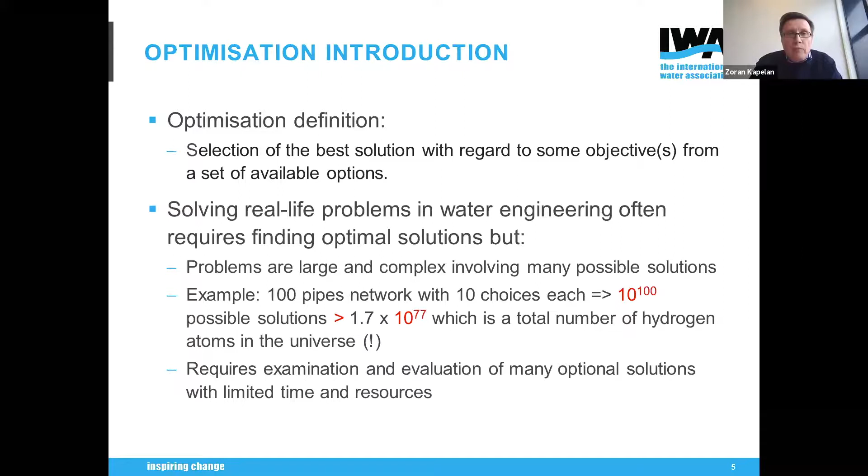So what is a typical optimization problem? Well, the three main aspects of an optimization problem are the objective, decision variables, and constraints. In this little example shown from mathematics, let us assume you want to find the minimum point on the surface of the function y, and you do so by modifying the values of x1 and x2 over certain ranges of values. So x1 and x2 are decision variables, and the objective is to minimize the function.

If I make the analogy with drinking water systems, for example with the least cost design problem, your objective may be to minimize the design costs of interventions over, say, the next 20 years to deal with increases in demand. Decision variables are all interventions that you could apply to individual elements - pipes, pumps, treatment works, anything to do with either rehabilitating existing elements, or duplicating with new, or replacing with new, and so on. In terms of performance, of course, you would want some performance which is above a certain target performance. Otherwise, you would end up with a zero cost design.

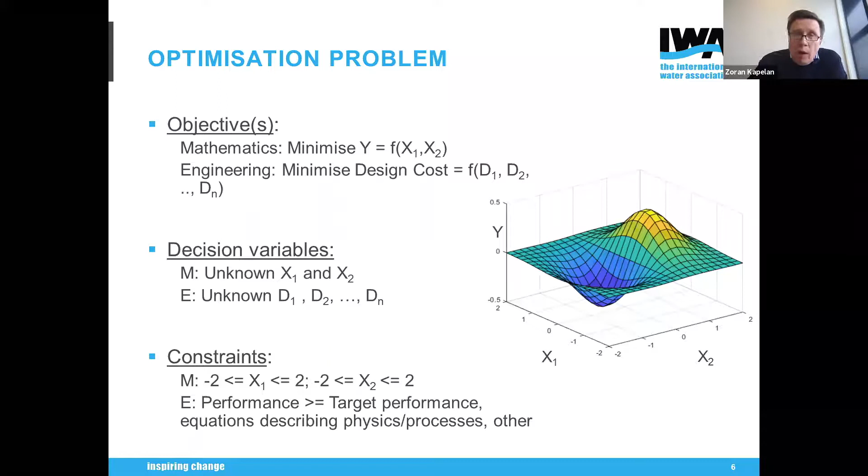In terms of optimization methods, these are used to solve an optimization problem that is formulated by means of objective functions, decision variables, and constraints. Many methods exist - it's impossible today to look into all of them. These are quite often classified in a number of different ways. Here are some examples shown: linear versus nonlinear, local versus global search, and so on. The point I want to make today is there is no single best method, because of the very wide-ranging problems that we need to solve. So it's very important to choose the right method.

This little figure here shows you an example of that. This is from my own work. This was the optimization for the purpose of calibrating some model. On the vertical axis you see an objective function value, which is being minimized, and the minimal value is shown with a dashed horizontal line. The horizontal axis is the progress of optimization. If you use the Levenberg-Marquardt method, the LM method, which is a gradient type method, and if you choose the starting point well...

...then you converge quickly - that's the green line - to the optimal solution. However, if you don't choose the starting point well, then you may end up with a suboptimal solution - that's the black line. As opposed to that, the blue line, the genetic algorithm evolution type method, will give you the right solution, but it will take a lot of time to do that. On this particular occasion, I developed a hybrid method, which is the red line - a hybrid of the two methods, GA and LM, which picks up the best of both. So it consistently converges to an optimal solution, but does this more efficiently than the GA.

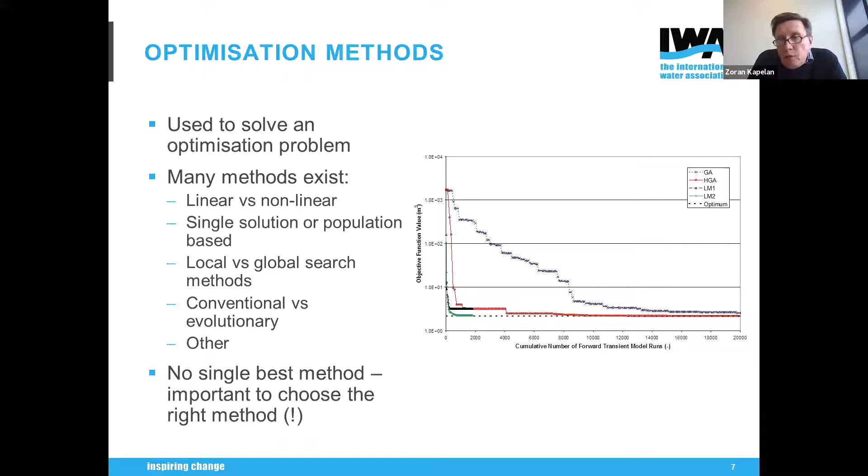Let me touch upon the trade-off between single and multi-objective optimization. Imagine you are optimizing a drinking water system for cost and performance, and you decided on a target performance. If you optimize for least cost design, you get a single point solution. However, this single objective approach doesn't really help you understand the trade-off between cost and performance because you only have one point. If you formulate this as a two-objective problem, maximizing performance and minimizing cost at the same time, you end up with a whole set of solutions shown as a curve. This gives you a much better picture of the trade-off. If you have a budget in mind, you could go for the first solution below that horizontal line.

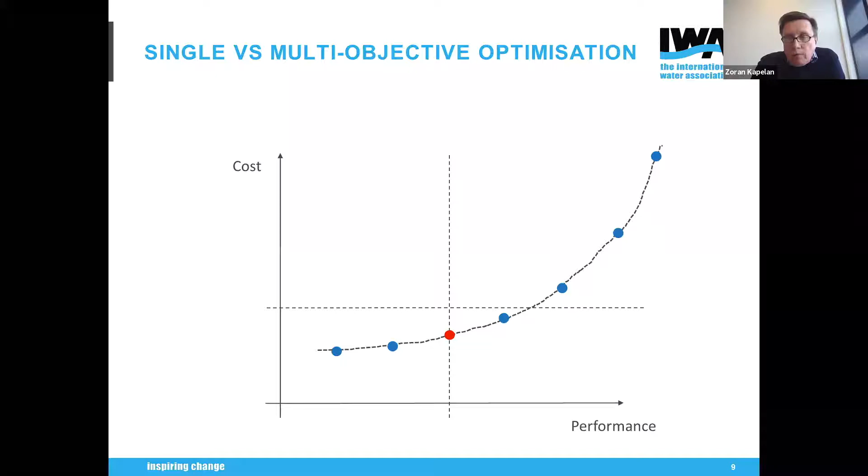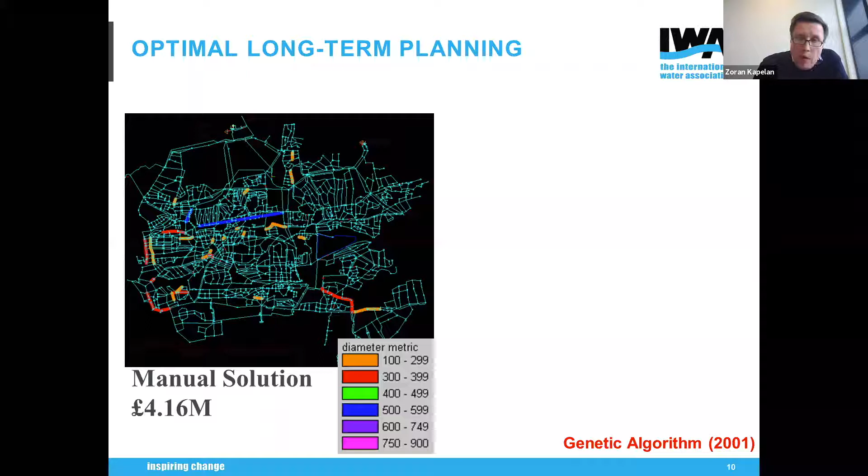Let me give a few examples of where optimization can be applied to drinking water systems. An obvious one is optimal long-term planning. This is the system of Heaton Grange in London, where we used a genetic algorithm back in 2001. This is the manual solution determined at the time by a reputable company. The idea was to strengthen the system for the next 20 years so it could deal with increased demand. The existing system wasn't able to do so, especially in the southwest part where pressure was deficient. The company came up with a list of pipes to be added or upgraded, costing just over £4 million. When we optimized the same problem, we ended up with a solution at half the cost - a saving of 49%.

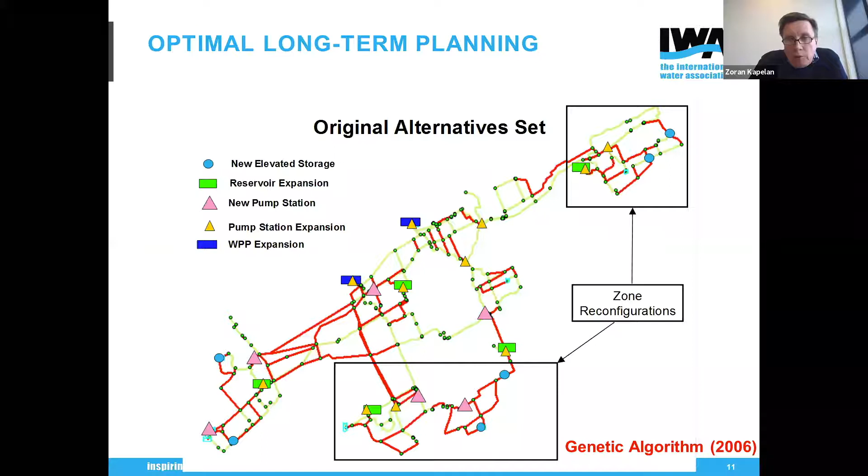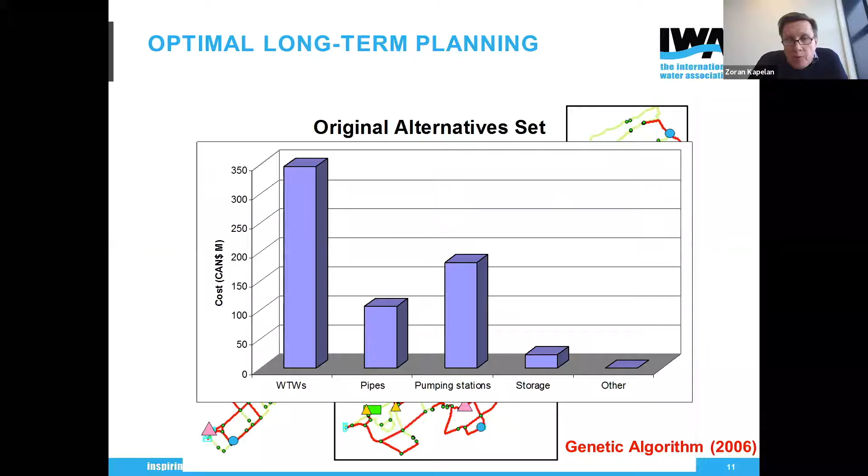Another optimal long-term planning problem I was involved with was the city of Ottawa, back in 2006. This was quite complex, with more than 200 decision variables. It was solved as a least cost design problem, but we had to take into account water quality and other issues. Interestingly, once solved, it turned out the most money had to be spent on upgrading the treatment works to deal with increases in future demand, then pumping stations, and only then pipes. Yet quite often in the literature, pipes are the focus of research most of the time.

Another example is pump scheduling. As opposed to system design, you can optimize an existing system - take the current configuration and see how you can get the most out of it. A lot of people have optimized pumps in the past to reduce energy use and cost. However, most of this was done without considering water quality. It turns out you have to take water quality into account, because if you don't, you may worsen the water quality during scheduling - and that's what this approach helped address.

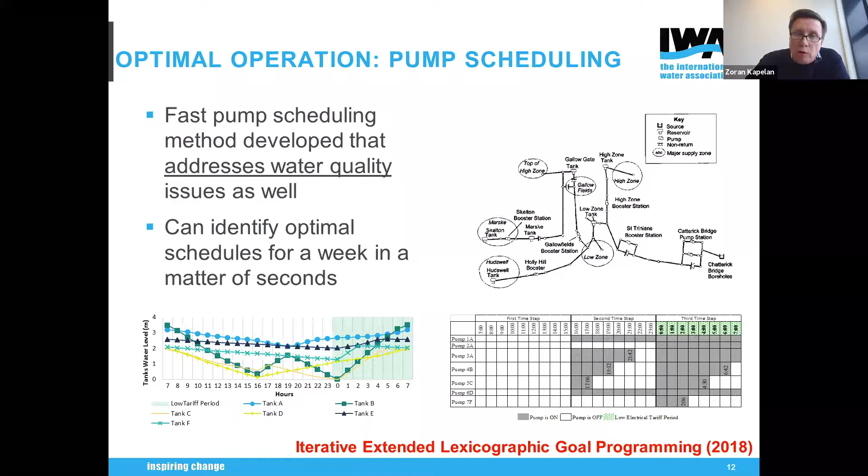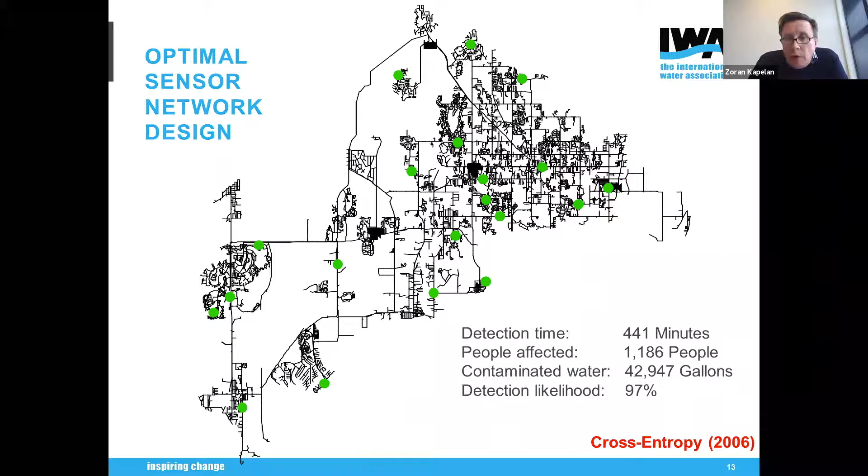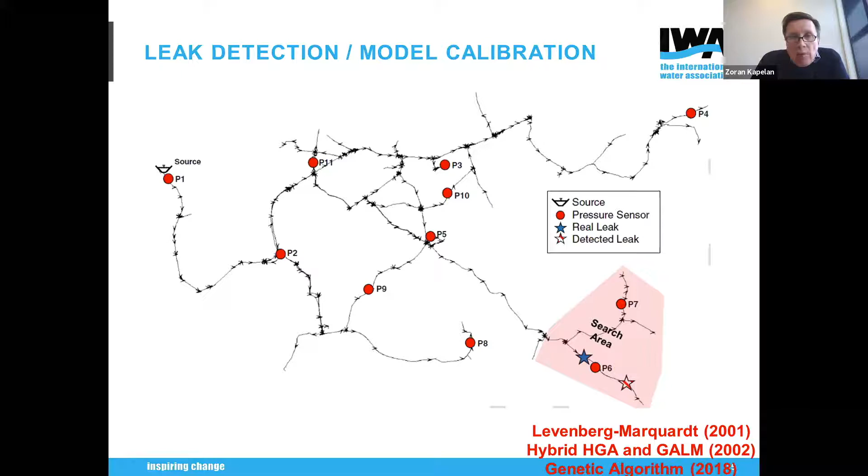Optimization has also been used a lot for leakage detection and model calibration. I've certainly done this myself on a number of occasions using different methods. It can be quite useful for that as well, especially for detecting background leaks.

Optimal real-time response to incident. This is one of the more recent developments in research. As you can see in the top left corner, there's a Pareto front between the negative impact of an event, which is a pipe burst, shown with a red symbol. When the burst happens, all the pipes in this little DMA basically don't have water. If you do nothing, zero interventions, you get a high negative impact - a lot of people go without water.

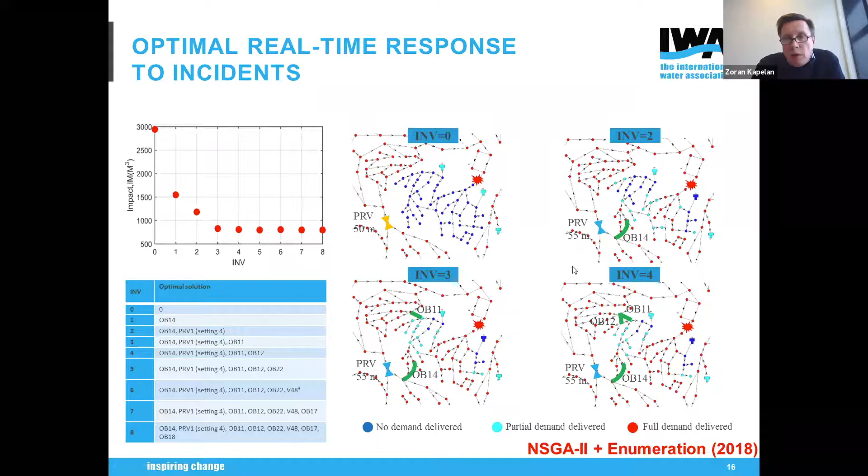However, if you can do things even in near real time to improve things, you can introduce an overland bypass or change the setting of a local PRV from the other DMA, and this will improve things. But this, of course, comes at a certain cost. So with this Pareto front as shown here, a control room operator can quickly decide what to do in the field based on this.

Another example, real-time demand forecasting. The demand forecasting itself on this occasion was done by a neural network, but this neural network's structure and the rest was optimized by means of an evolutionary strategy algorithm. This ended up actually being used by Hong Kong Water Supplies Department a while ago. I'm not sure if this is still the case or not.

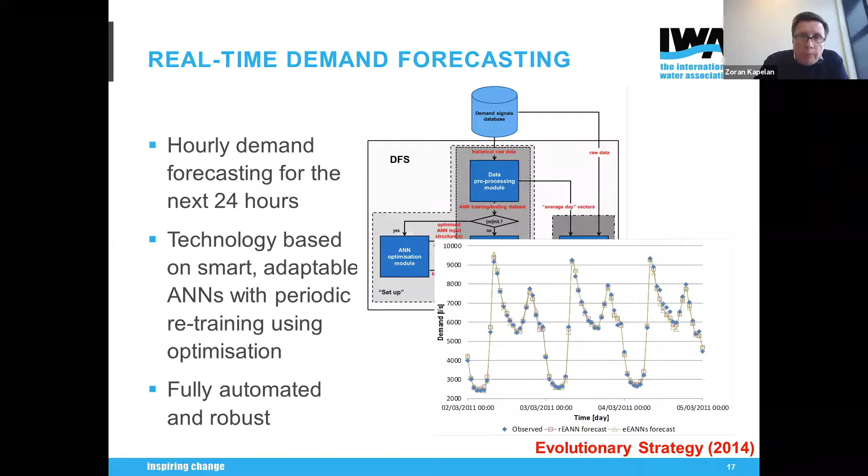Optimal pressure management. In this particular case, you are deciding where in the system to install your pressure reducing valves, of what type - fixed setting, time modulated, flow modulated - to basically reduce leakage as much as possible, or in this case, to maximize the net benefit as shown here. You can see on the left figure that the existing solution and the newly proposed one are quite different, and the newly proposed one ends up with a total net benefit more than double the existing one.

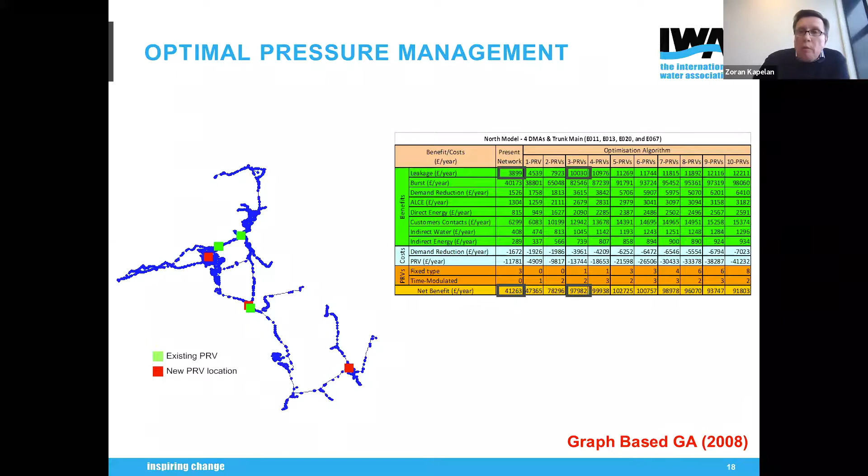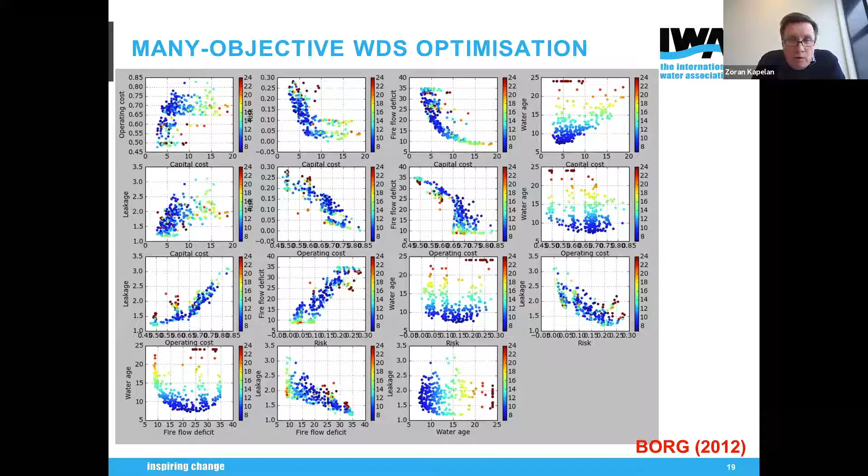The final slide I will show is on many-objective distribution system optimization. I believe this is the future of optimization in drinking water systems. In this particular case, the system was optimized for 6 objectives: operational cost, capital cost, interruption to supply, fire flow deficit, water quality via water age, and leakage, if I remembered well. You can see clear trade-offs of the 6-dimensional Pareto front. But I would personally like to see more of these applications because the real world is more complex than just least cost design. Thank you.

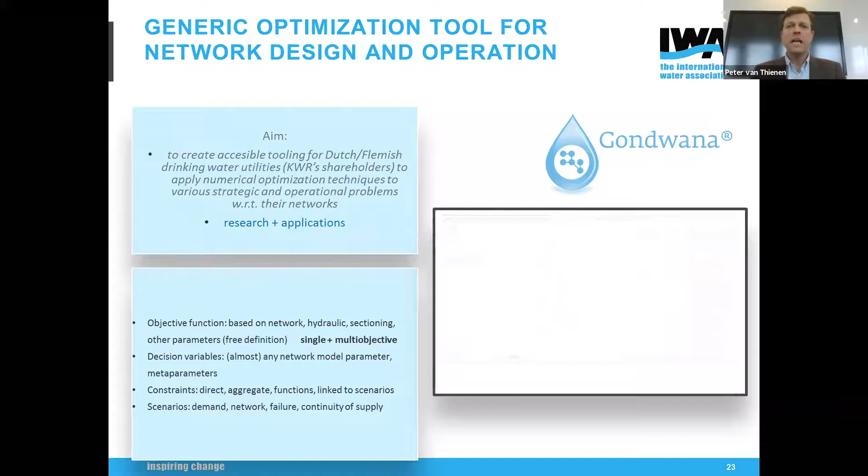So like I was saying, I'll start with introducing the optimization tooling that we have developed. The tool we have developed is called Gondwana. It's a generic optimization tool for network design and operations. And initially, we developed this to help the Dutch and Flemish water utilities, which are our partners, which are our shareholders, to apply numerical optimization techniques to the problems that they're facing. Actually, the tool was developed both for research purposes within our institute and for applications to their challenges.

So the tool is supposed to be a very generic tool, allowing you to define all kinds of optimization objectives, both single and multi-objective problems, and to have all kinds of decision variables.

This includes almost any network parameter in the description of a network model, but also meta parameters, including the positioning of water quality or quantity sensors, for example.

It allows you to add all kinds of constraints, either direct or aggregate functions, or linked to all kinds of scenarios. These scenarios can include network failure or demand scenarios, but also continuity of supply studies, introducing subsequent failures of pipes all over the network.

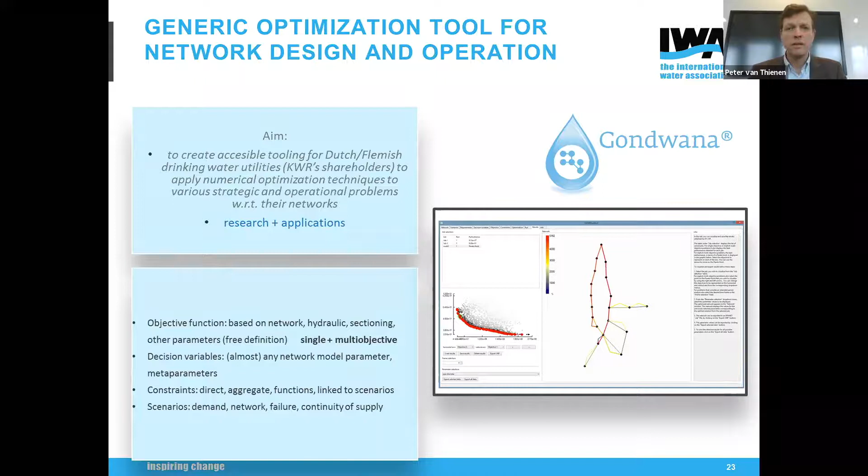So there are 5 classes of case studies which we have done, and which all demonstrate how to get the biggest bang for your local currency.

These include the sizing of pipes in an existing network, or a network master plan for future design, and the optimization of a transition from the current network layout to a master plan layout for the future.

It includes sectioning or subdivision of a network into DMAs, the optimal placement of pressure sensors in a network to detect leakages, and the optimal location of water quality sensors in the network.

I don't have time, unfortunately, to discuss all these, and actually most of these were also mentioned by Zoran. My presentation allows me to go a little bit deeper into 2 of these cases. The first one I'm going to discuss is about pipe sizing.

So, of course, network or water utilities try to think about what their network should look like in the future, for example in 25 years' time, considering the development of the demography, etc.

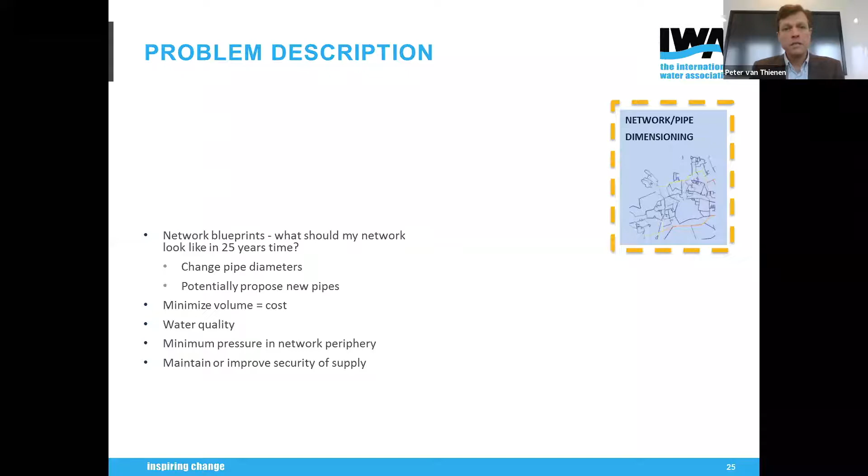The objective here was to minimize the volume of the network, which is of course a proxy for the cost of the network, while maintaining water quality, maintaining minimum pressures in the periphery of the network, and also maintaining or improving the security of supply.

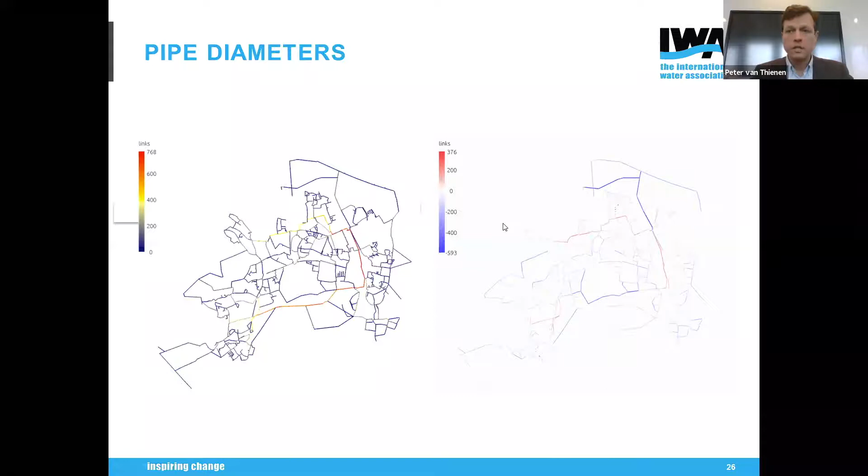So what the optimization algorithm does is show you how, by increasing the size of a small number of pipes, you can reduce the size of many other pipes, ending up with a design which is a lot smaller in volume, and so a lot cheaper to realize.

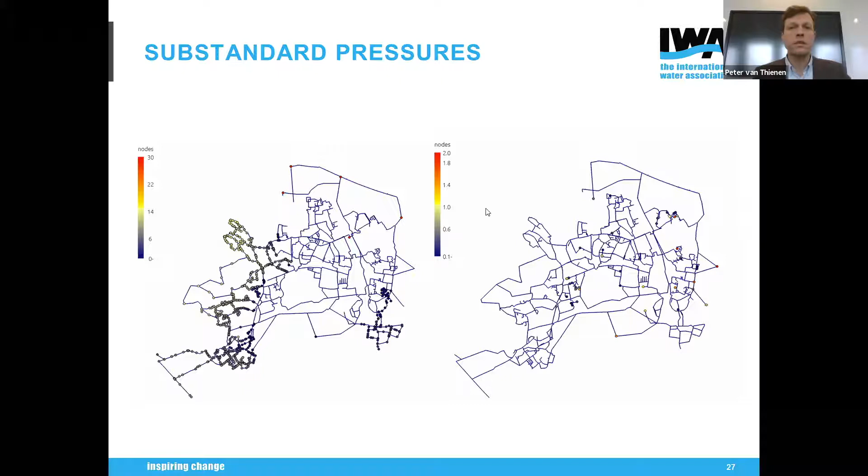To summarize, we have a new design which is 36% smaller, so approximately 36% cheaper than the current layout, with improved hydraulic performance.

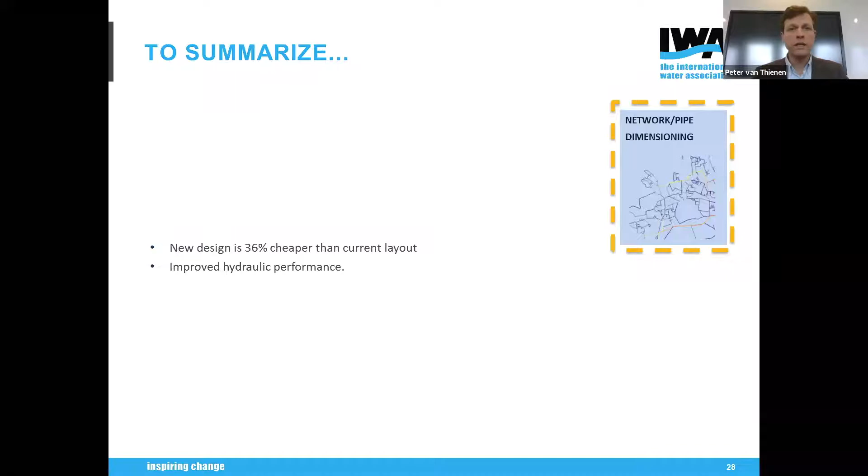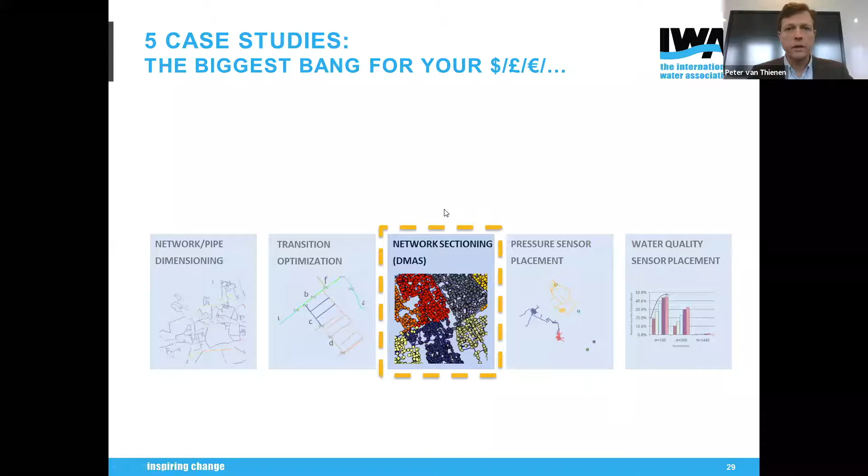The second case I would like to discuss is about sectioning of a network. Contrary to many countries, the Dutch drinking water distribution networks have a very open layout.

They do not have DMAs, and water utilities have not been interested in installing DMAs because leakage has been so low in this country. But this is changing.

They are getting more interested in leakage, and they are getting interested in introducing the DMA concept in their networks.

So this specific problem is about the question: how do we transform this big open network into a bunch of DMAs, virtual DMAs? These are areas for which you know the net amount of water which is used.

You measure all the water which goes in and all the water which goes out. So what you would like is to have very small DMAs, because these allow you to detect small leakages.

But if you have small DMAs in a big city, you have many DMAs, which means that you need to install a lot of flow meters on boundaries, which is expensive, of course. So actually these are two competing objectives.

And then there's another thing to consider. You could decide to close off a number of boundaries between DMAs by not putting in a flow meter, but just closing a boundary valve or even removing the pipe. But this may have effects on the security of supply, so this is something which needs to be considered as well.

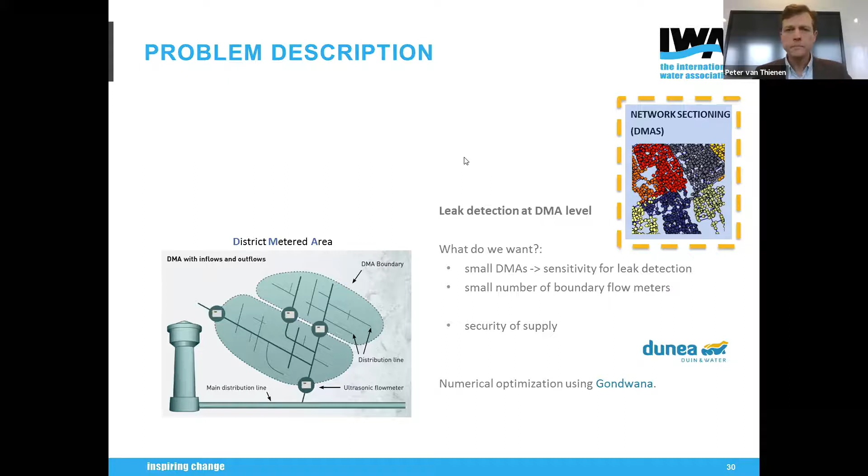So what we did first for this case was take the network model, and the water utility indicated that they did not want to have the supply lines, the transport lines, be part of the DMA. So we excluded them from the consideration. And they already installed 14 flow meters, or planned them. So actually before we got started, they already had 4 distinct areas in the network.

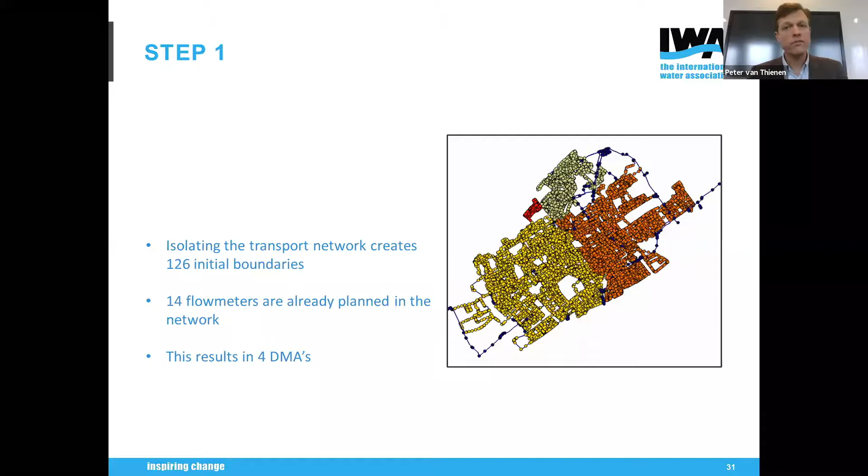So then together with them, we defined the optimization problem with 2 objectives. The first one was to minimize the net boundary flow into a DMA, which means maximizing the possibility to detect small leakages in such a DMA. And on the other hand, we were trying to minimize the number of boundaries in the total system, reducing the cost for the water utility to install these flow meters.

So what we see here is, like Zoran explained, we have a Pareto front in which we see many combinations of optimal solutions for these 2 objectives. We created this for the water utility and allowed them to study it and play with it. There were a number of solutions which were very interesting for them, and by showing them all, they could compare and see which one would be most practical. In the end, they decided to have this design, which you can see here.

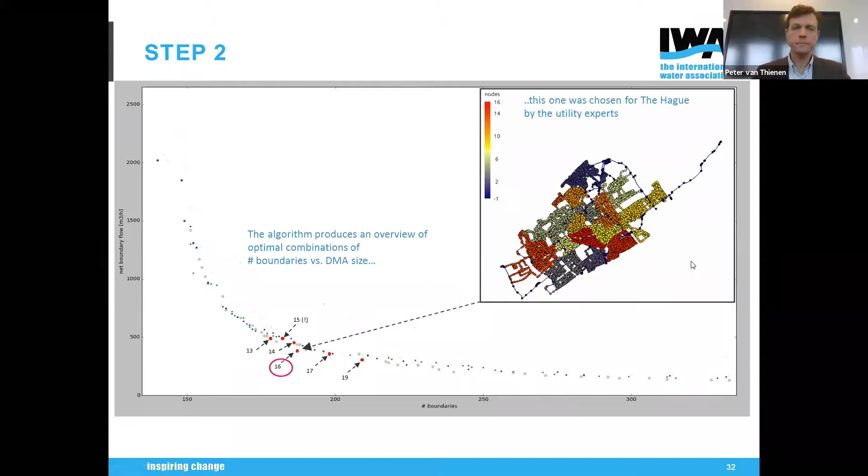That was the second step. But then the third step revolved around the question: do we need to have all the identified boundaries open with a flow meter installed, or can we close a number of them off, thus again reducing the cost? This also was formulated in terms of an optimization problem.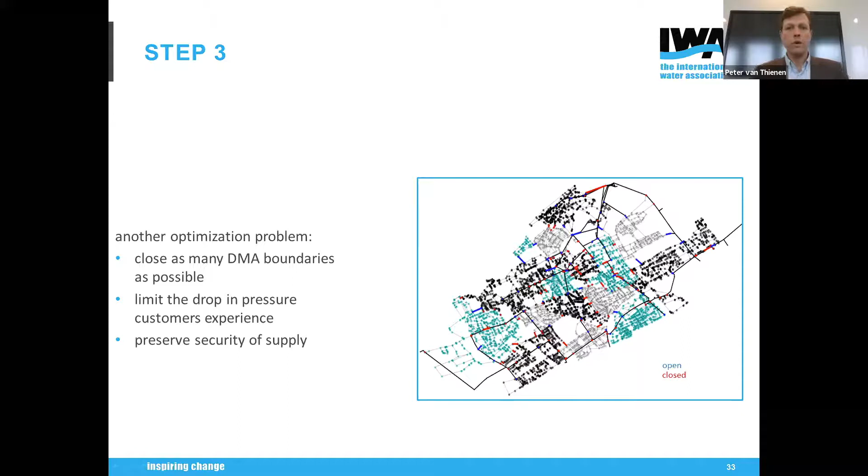And here we had as a boundary condition that the drop of pressure caused by closing off pipes, experienced by the customers, should be minimized, and also the security of supply should be preserved. After running the optimization, we found that maybe half of the pipes indicated in red here could be closed, whereas the other half should be fitted with flow meters.

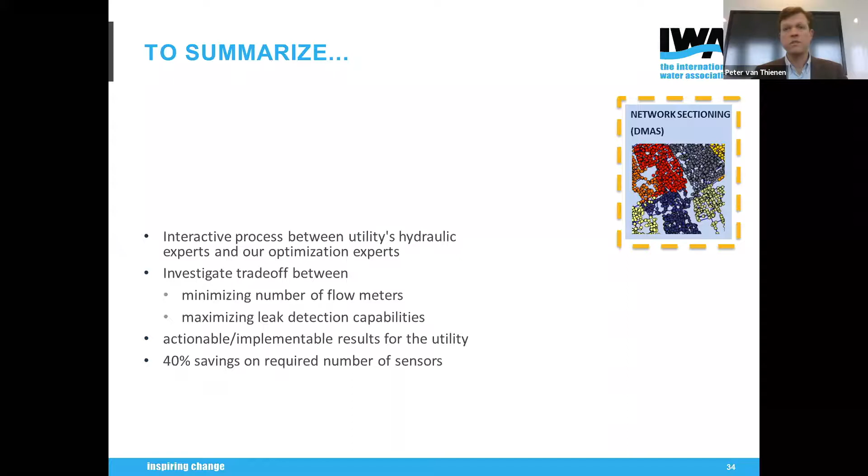So to summarize, this was something which we did in a strong interactive process with the hydraulic experts of the water utility, minimizing the number of flow meters and maximizing the leak detection capabilities, which resulted in really actionable, implementable results for the water utility and a saving of 40% on the number of sensors required with respect to what they had in mind. So that's a very good result.

So just in general, what do you need to do this kind of optimization? Well, everything revolves around a representative hydraulic model. And in addition to that, you need some additional relevant data and information, for example, the cost of installing pipes or the cost of installing sensors.

But in our experience, the most important thing in such a process is the interaction between the optimization experts and the hydraulic experts of the water utility. It's very important that the optimization experts understand what the water utility actually wants, and also that the hydraulic experts, to some degree, understand what the optimization process is about. This is something we have refined over the course of a number of projects, and it's really starting to pay off.

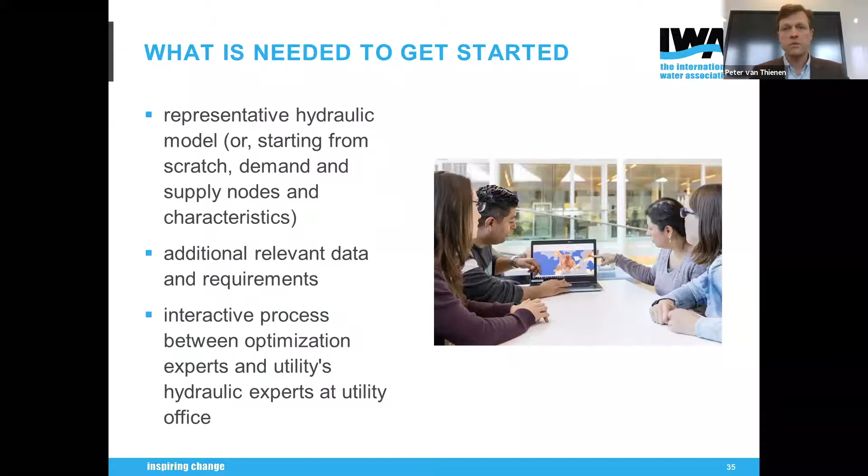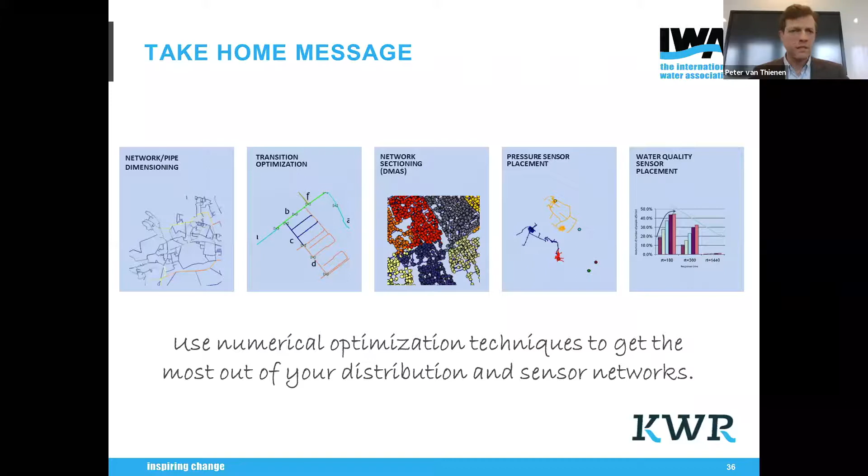So these were 2 examples from Dutch utilities, and I'd just like to say that I think this is very general, and it could also be applied in other countries, as I'm sure Joshua is about to show us. So my take-home message is that it pays off to use numerical optimization techniques to get the most out of distribution and sensor networks. Thank you for your attention.

Thank you, Dr. van Thienen. It was very pragmatic and concrete, so I think we got a lot more details on what we can really do about optimizing drinking water systems. And Dr. Cantone will also give us some real case examples.

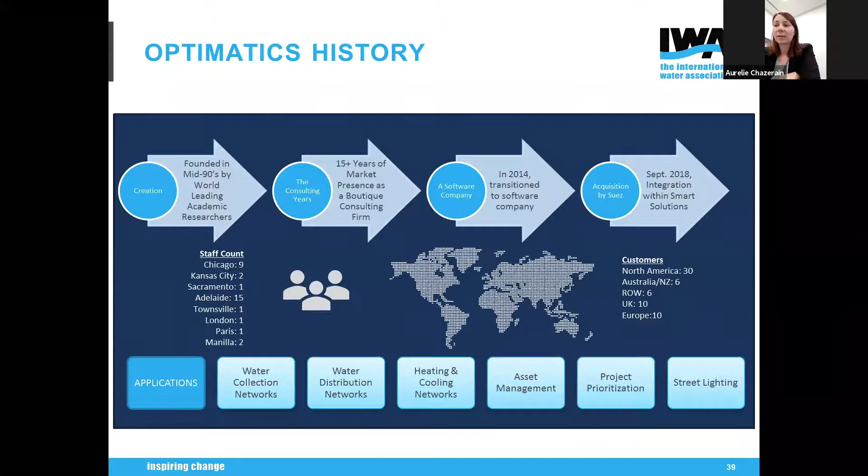So he's the Chief Operating Officer of Optimatics, where he strives to help water utilities understand and apply optimization to a real-world problem. Josh did his undergraduate studies at the University of Adelaide in Australia, and his postgraduate work at the University of Illinois in the USA.

A pleasure to be part of this webinar series, and thank you for your kind introduction. So first of all, thank you to Peter and Zoran as well for their presentations. They provide a really good lead into what I'm going to present.

One of the differences in terms of the presentations thus far, the mantra of Optimatics is really to provide a commercial software product that's available for users around the world to apply optimization to real-world networks. Optimatics was founded as part of a research project at the University of Adelaide back in the 90s, but over the past 5 years, our focus has really been on commercializing the software and putting it in the hands of our engineers and planners at water utilities and consulting firms around the world. The growth of the use of our tool Optimizer has been quite successful, and we now have in excess of 50 customers worldwide using an optimization tool, very much like the ones that Peter and Zoran have described, for a varying number of use cases.

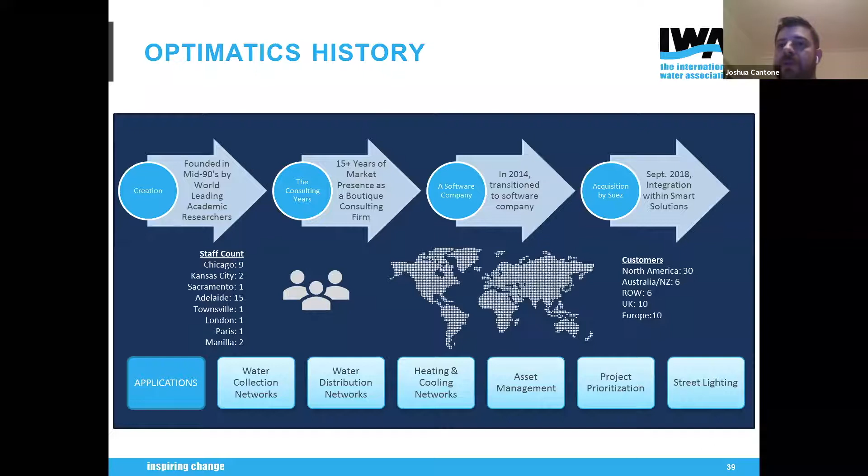So for water distribution networks and water collection systems and a few other applications as well. I'm going to focus today on water distribution networks, and in particular, I'm going to give 2 examples that have been delivered in the UK. In both cases, these examples and applications were delivered by the utility in coordination with Optimatics or an external consultant.

So the first application is for Southern Water. They're a large utility in the south of the UK. You probably know of a place called Brighton. That's one of the largest cities, the coastal city that's significantly growing. They serve a lot of different people, almost a million metered properties within their distribution network. So quite a large number of customers and a lot of distribution and transmission main that they maintain and manage. This project was a collaboration with Arcadis, a consulting firm, Southern Water, and Optimatics.

So they chose a network that they were focusing on. One of the things that Southern Water has been working on is looking at resilience of their networks. How do their networks respond to severe outages? What's their response times like? How many customers are affected? Those kinds of things. One of the ones that they've been focused on was a network called the Thanet network. This particular network not only has issues with resilience, it also has issues with water quality, in particular nitrates from the source water.

So a new standard was coming into effect, and they really needed to develop a reconfiguration of their network that would allow them to reduce the nitrate concentrations at key points throughout the system.

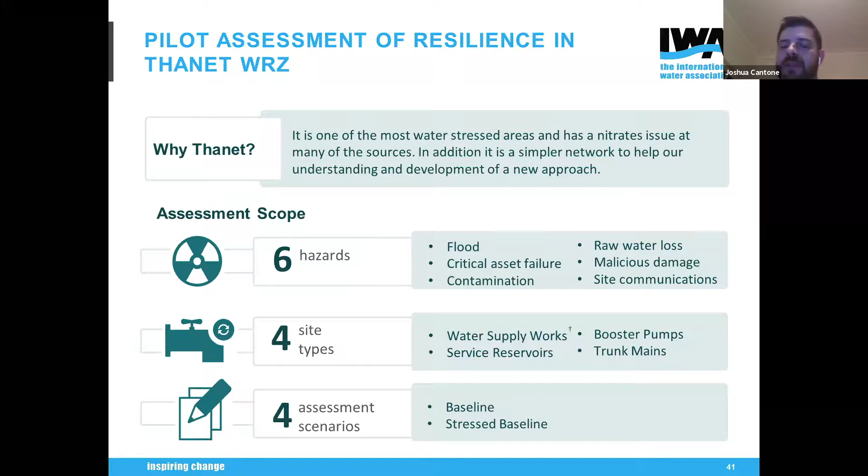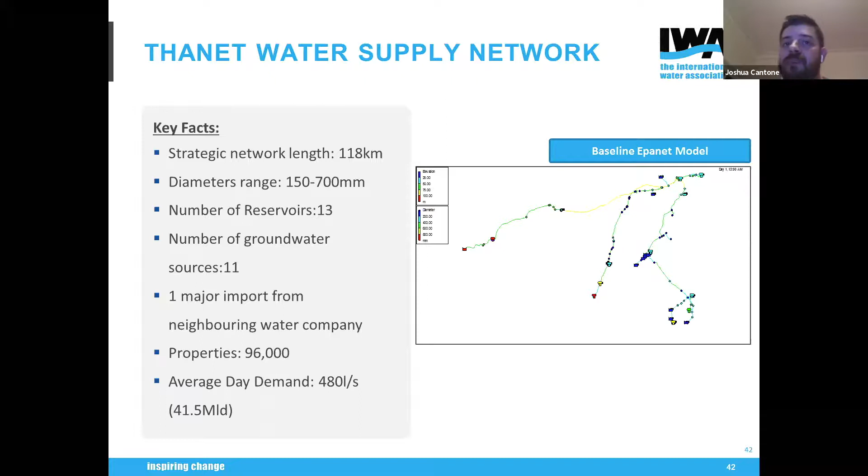So the network here, there's a few details. In this case, we had both an InfoWorks WS Pro model as well as an EPANet model that we used to look at this problem. I will note here that in Optimizer, you can import directly an InfoWorks model, a Bentley WaterGems model, or an EPANet model, so it's quite flexible in terms of the hydraulic model that you can import. In this case, the model was primarily a transmission model that we were looking at. We didn't look at all of the distribution mains, so it was relatively simplified, but still a network of 118 kilometers.

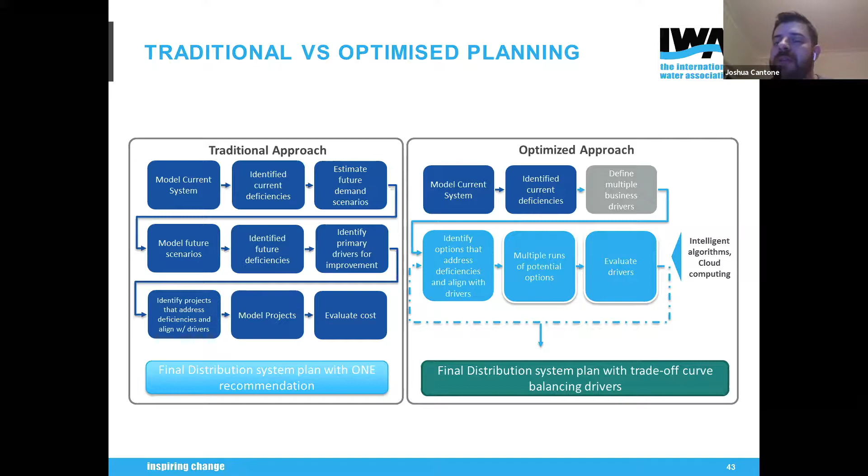In our case, we use meta-heuristic optimization, and we do it in a cloud computing environment. So all of the optimization simulations that we do are done on the cloud. That allows us to look at larger networks and water quality problems and get results back in a time-efficient fashion.

So in this particular case, the optimization problem - any optimization problem - can really be defined by three key functions. You've got your objective functions, you've got your design criteria, you've got your decisions and your options, and in most cases, our optimization problems revolve around cost.

So in this case, we had an objective function relating to resilience, based on a resilience scoring methodology developed by Arcadis. We had an objective to minimize TOTEX, the combination of capital and operational expenditure, and one to minimize hydraulic performance penalties. So we're able to look at a three-dimensional optimization here, and we were looking to come out with different strategies that would help us meet those three objectives.

Our design criteria - we used a water quality model here, and we also looked at a number of outage scenarios. So we looked at 30 different outage scenarios throughout the network that represented different resilience events, and we had a 7-day water quality simulation for each.

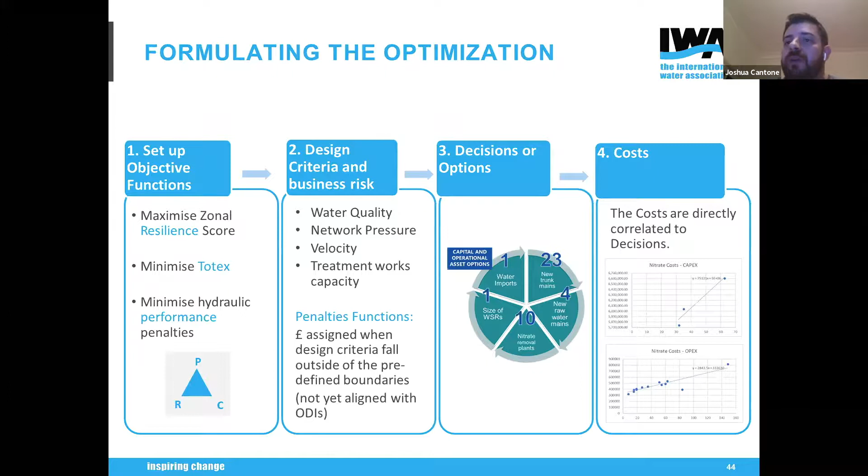In terms of options here, what were their options? Well, the primary option they were looking at was building nitrate removal facilities at their source water locations. So that was the primary one, but we were also looking at importing water, new trunk mains, and operation of the network. So what do you end up with?

Well, Optimizer looks at those different combinations of strategies and produces this Pareto front that you've seen in Zoran and Peter's applications as well. In this case, I'm just showing you two of the dimensions - there is a third dimension here, which is resilience. For ease of visualization, I'm showing you the two-dimensional one, but you can see that there's a manually derived plan.

This is a plan that Southern Water were proceeding with as part of their PR19 submission. And then you can see the plans that they really focused in on through using Optimizer - one that has significantly reduced cost but the same performance, or one that has a much better performance and improved resilience but costs about the same amount of money.

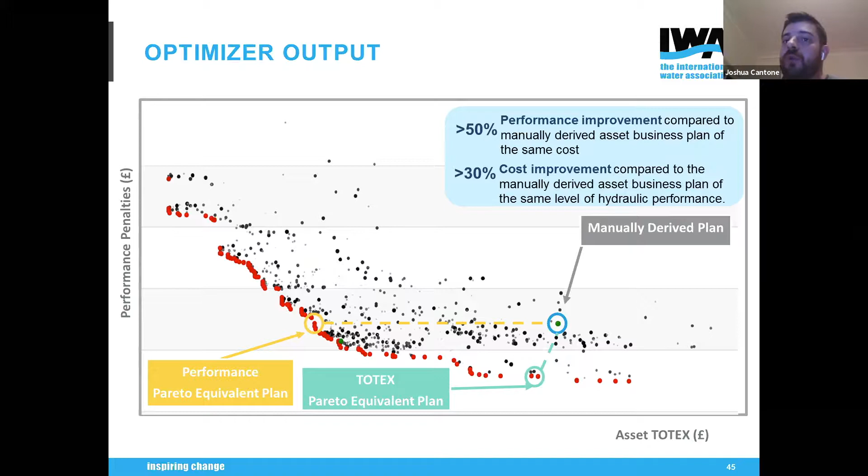So as you can see here, as a decision maker at Southern Water, you have the option to look at either having a solution that performs better for the same cost, or you could save significant capex. And so the solutions or the outputs - you can see you end up identifying where in the network you want to build those nitrate removal facilities.

Probably the biggest improvement here, or the most significant improvement in this particular case, was relating to the number of nitrate removal facilities. The optimization outcome resulted in only 2 nitrate removal facilities being recommended for construction. And you can see here that depending on what your preferred objective is and how you want to balance your objectives, you can have different solutions.

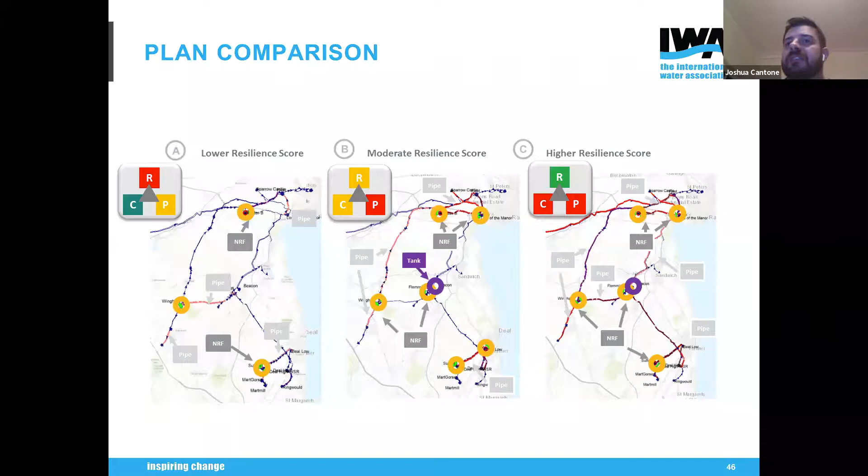The higher the resilience score that you seek will result in a number of additional pipes that provide redundancy, as well as a number of redundant nitrate removal facilities. So there really is a balance here between the cost and the resilience, as well as the performance of the network. So that was one particular example, really interesting in terms of looking at water quality and resilience.

The next one is a lot simpler. This was one that was done for Bristol Water. It's something that Zoran touched on as well, which is looking at how you manage the pressure in a network. The interesting thing here is that we were looking at a part of the Bristol Water system that's right in the heart of Bristol. It's already under significant pressure control, so in some sense, we were trying to squeeze out the last drop.

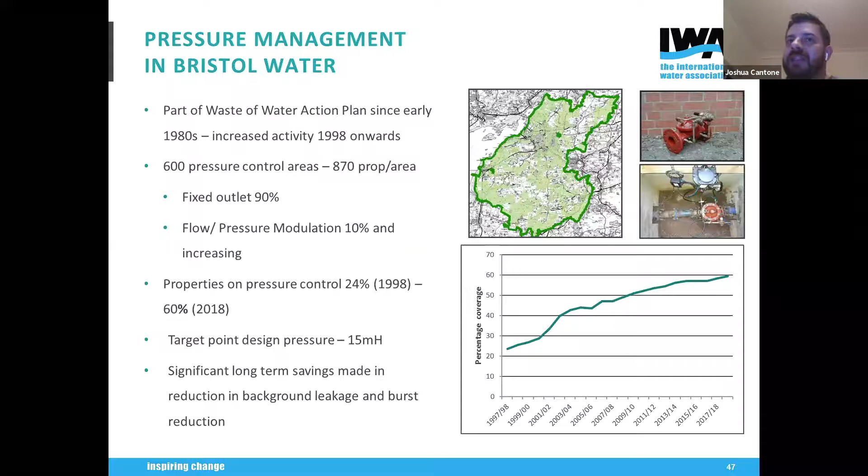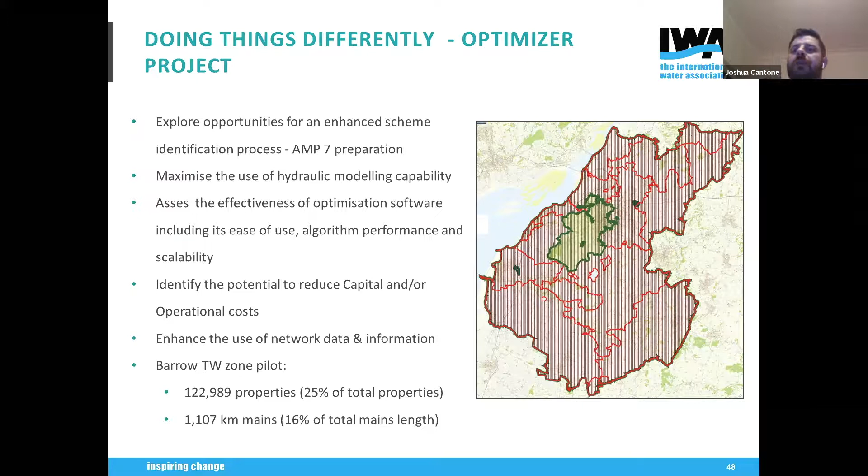Bristol Water is aiming for an additional 15% reduction in leakage as part of AMP7, and so they wanted to look at whether Optimizer could help them optimize their existing PRV settings, or potentially add new PRVs to the network in order to reduce that leakage. In this particular case, the decision variables were really focused around PRV settings and whether to build new PRVs. The criteria were focused around leakage as well as the pressure performance throughout the network.

And so again, we have one of these Pareto fronts. In this case, cost was not really a significant factor. There is a cost if we were to install a new PRV, but there was not really any significant cost to changing the setting of a fixed outlet PRV in the network. There are about 60 fixed outlet PRVs that we considered in this Barrow zone.

But the real trade-off is between reducing leakage versus affecting the pressure performance in the network. Each customer expects to receive water at a pressure minimum of 15 meters, and we didn't want to drop below that.

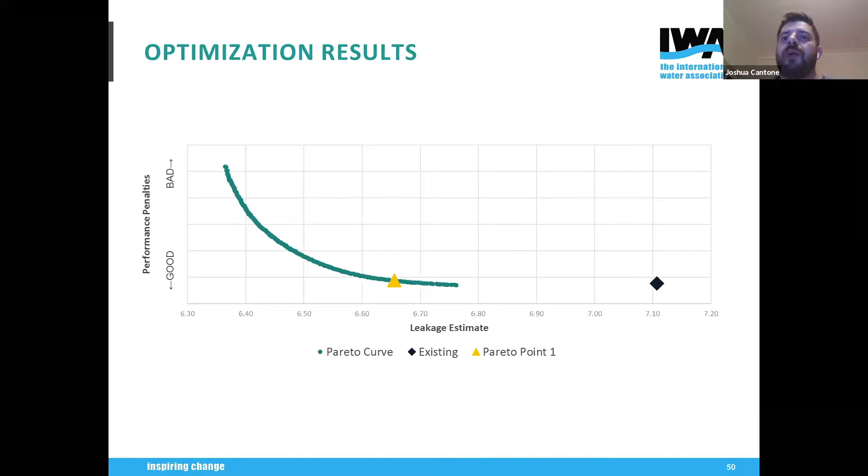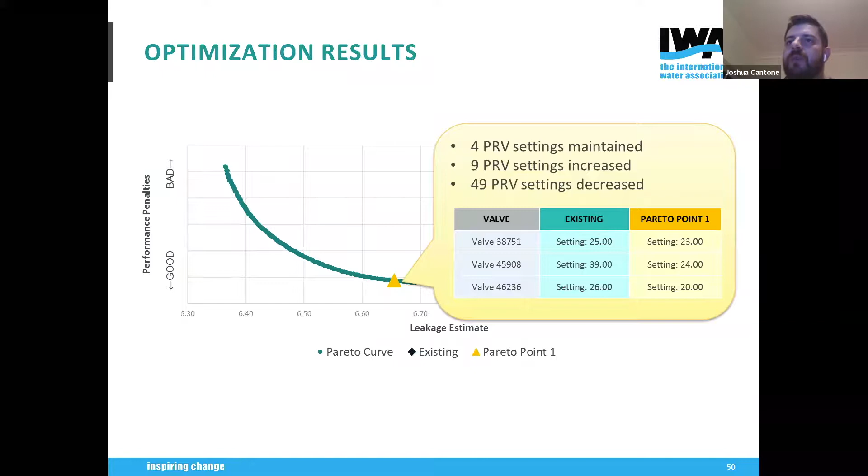So we're tinkering on the edge here of reducing leakage, but also maintaining a valid pressure profile for our customers. And you can see here that we were able to get a significant reduction in leakage by changing the existing valve settings. In the majority of cases, we are either increasing or decreasing the PRV settings. And what that yields is a 6.4% decrease in leakage, which is quite significant for Bristol Water. That's about half a meg a day, about a quarter of their 2 meg a day target across the Bristol Water service area.

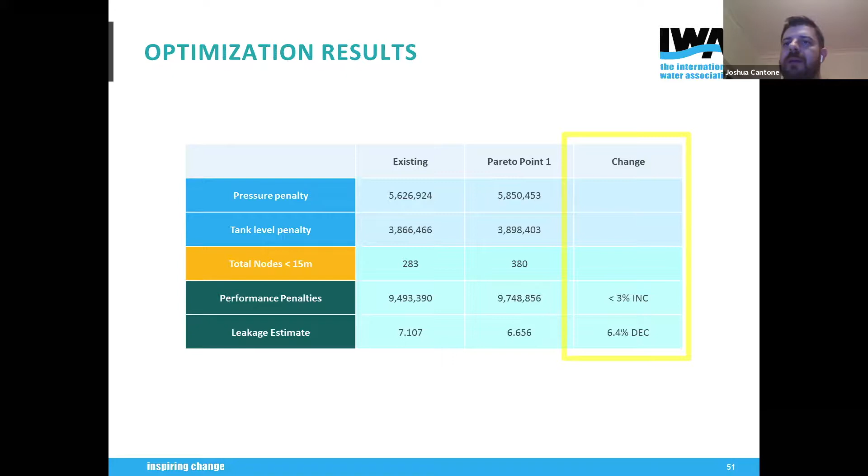So this proved to Bristol Water that this is a method and a tool that can help them manage pressure better within the network, that they can squeeze out a little bit more. This is an application now that they're going to apply to other zones within the Bristol Water service area, and it's a very similar application to a number of the UK utilities we're working with. I will leave it there.

Thank you, Josh, for this additional information. We see that there was a lot of application of all these optimization algorithms and methods to the water distribution system. We have quite a lot of questions. I will open the discussion now, and I will read some selection of those questions to the speakers.

So the first question, and it's actually a question that I had myself, is about how we integrate the operational team experience in the optimization process. How do we make sure that the results of the optimization are compatible with the operational constraints and that we take them into account? I will open this question to all three speakers because I think all are concerned.

If I may start, this is a very important question. In the beginning, we experienced a lot of problems with this, trying to find solutions which actually meet the requirements and expectations of the water utilities. So what we do nowadays is our researchers work at the office of the water utility for which we do the optimization, maybe 50% of the time. Our researchers and their hydraulic experts spend a lot of time together at the screen, looking at the results, discussing the results, and in a number of iterations they come to a solution which is optimal and which also meets the requirements of the water utility. So it's really a co-creation in that way.